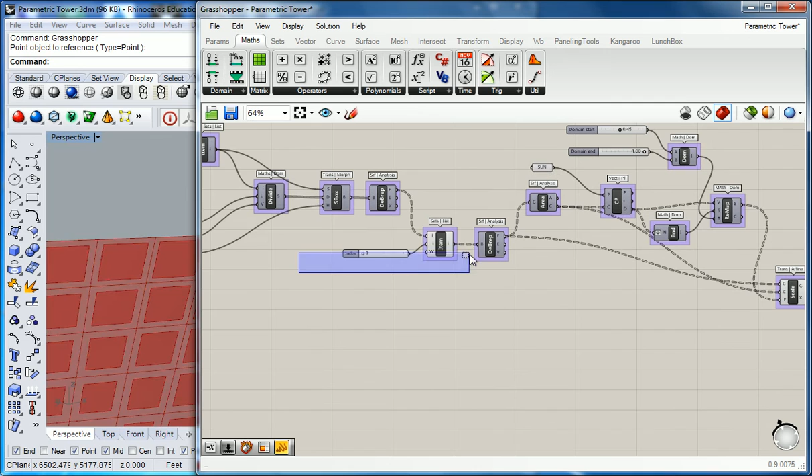So what we need to do is grab the four corners of this surface, and then we need to take list item and get the front surface and grab the centroid and connect those with lines so that we get our pyramid. And that's going to be the beginning of the way we're going to construct this. So to get the centroid, that part's really simple.

So just do a copy and paste on the list item, slide it down a little bit, and change your index to 5. Or if you're already on 5, then change it to 0. And that'll give you your front and back surface like that.

Should we increase the space between them? If you want to, yeah, I would. I would give it some good depth. Like proportionally, I'd say if your panel is, yay wide, you should probably have at least half the width or height of your panel in between them. Something like that, just for visibility's sake. Okay.

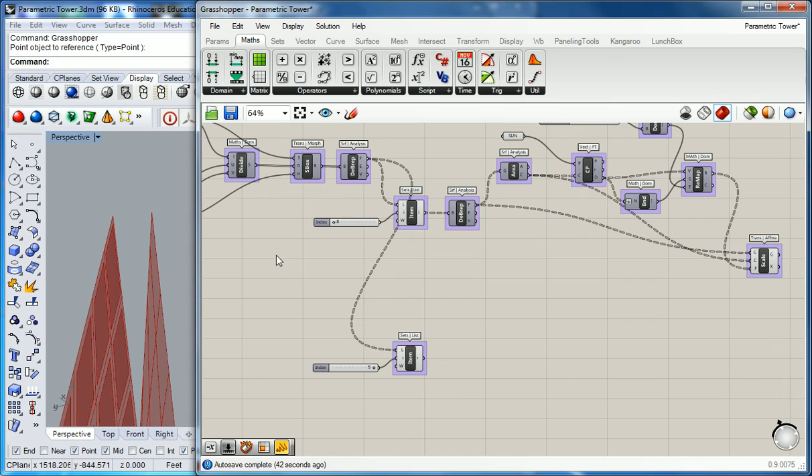Now, the centroid is really simple for us. Now that we have our list item, we just need to do an area and plug that into the list item, and that gives us our centroid. And then you can move it kind of all the way over here closer to scale, because we're going to do some things to scale and then use the area very shortly after that.

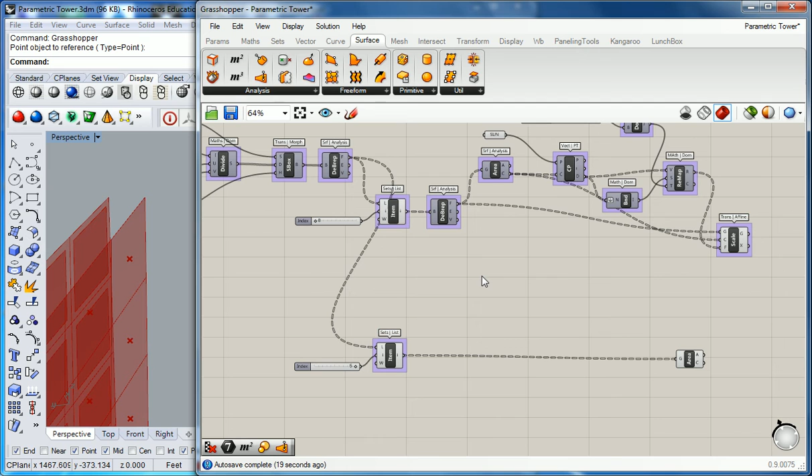So for simplicity's sake and for visibility's sake, take your two list items and turn them off. You don't need the original surfaces anymore. Sorry, that's up there. These. Turn these off. All right. So now we're going to go back up to where our scale was, and we're going to work on the scaled geometry.

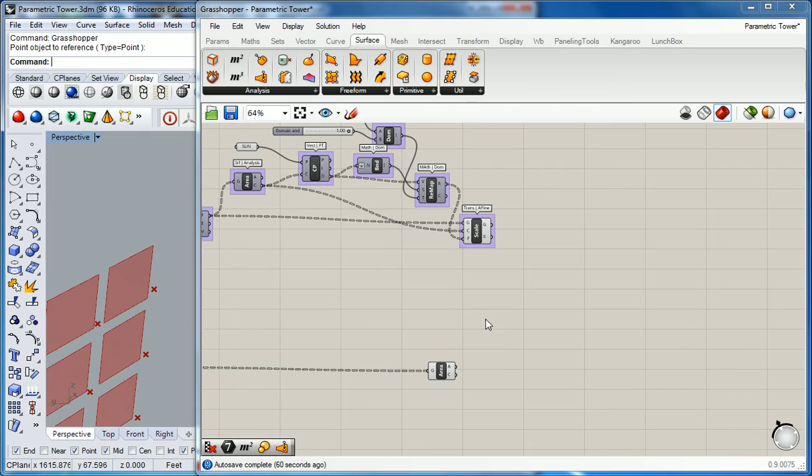By deconstructing it into component parts, but in a very different way than you're used to so far. So in order to get my four corners, that part is really simple. Obviously, it's just another deconstruct BREP. So deconstruct BREP on the modified geometry, and now you have all of the vertices. You can turn the original geometry off.

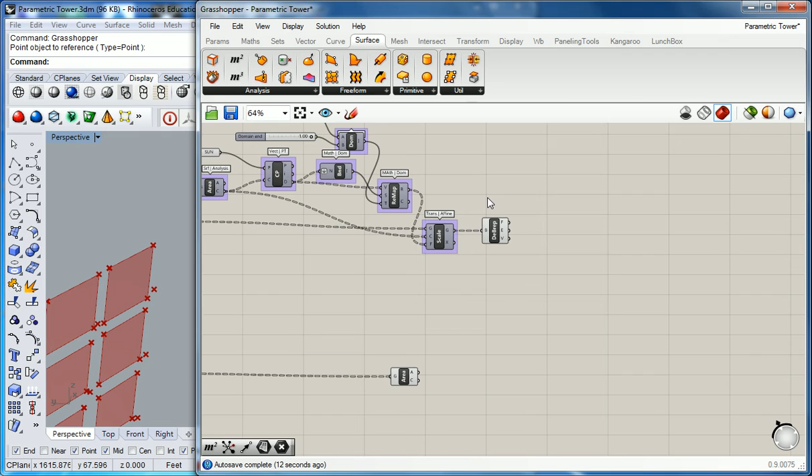We can, at this point, create a line, or we can create our quad lines, our quad legs like we did with the space frame exercise by dropping in a line under curve primitive line. And you can imagine all you have to do is connect the vertices from your deconstructed BREP to the centroid of your offset surface, or the alternate surface, I should say.

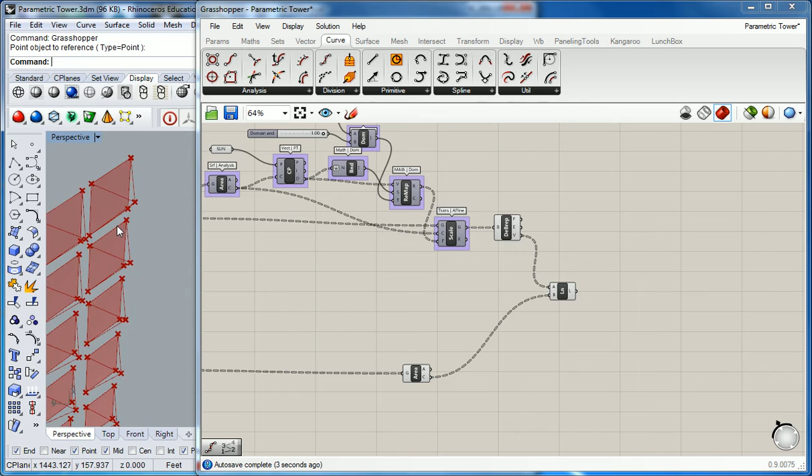All right, and it should look something like this. Every single one of these should begin to be constructed into a pyramid.

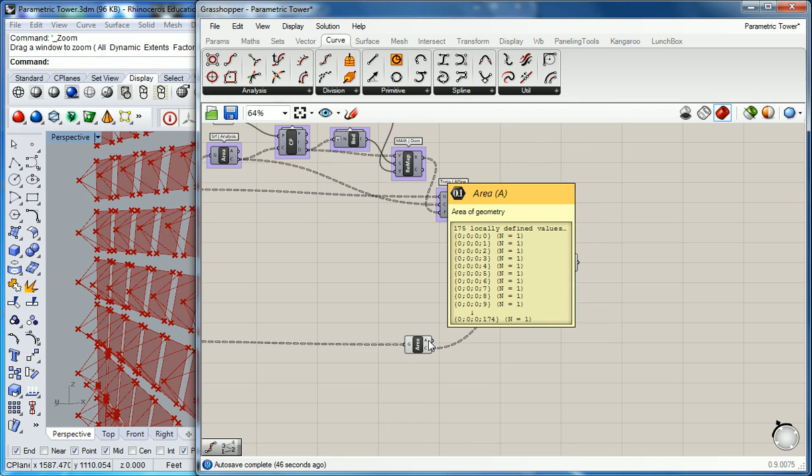What's the area node connected to? Nothing. Yeah, I don't have area connected to anything. You don't need area. Area is a numerical value. You want the centroid. Oh, okay. So the centroid is plugged into the line.

But what is that geometry for? Within that one. This? What is that plugged into? This is the geometry input, and it's plugged into your original list item, front face surface, yeah. Oh, you just repeated that, okay.

Okay. So, guys, the next thing we need to do here is do a couple of steps where we're constructing a line and finding the midpoint of that line. So, we're going to use the edges off of this deconstruct BREP and the faces. So this is kind of an all-encompassing, very important deconstruct BREP.

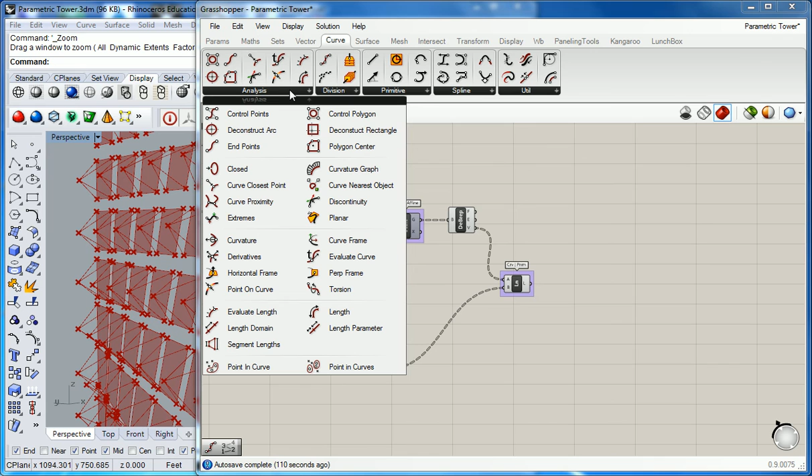It looks like this. Let me find where it is here. It's under Analysis, Evaluate Curve is what I'm looking for. There it is. So under Curve, Analysis, Evaluate Curve, drop that in, and let's take a look at it. It's going to ask you for a curve, obviously, and then it will ask you for a parameter on that curve. And the important thing to understand about that is

when you reparametrize something, remember when we did our domain construction of a surface, you're setting a percentage of that surface via a numerical value, right? So 0.5 would mean that your domain for either the left or right side or the top or bottom side would be halfway across the surface.

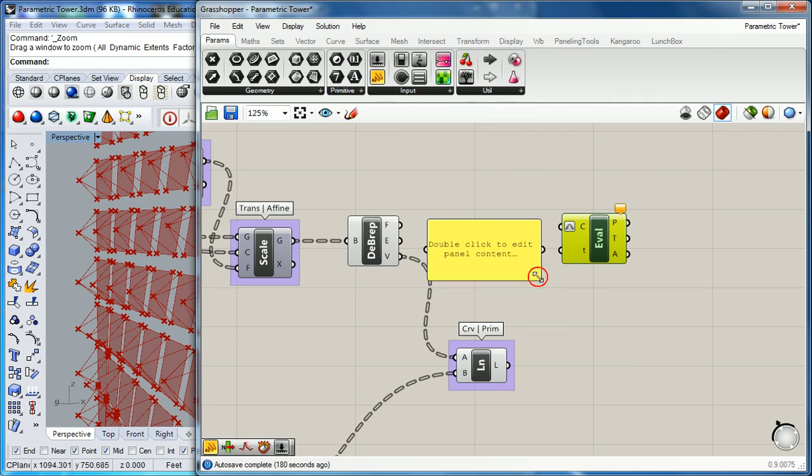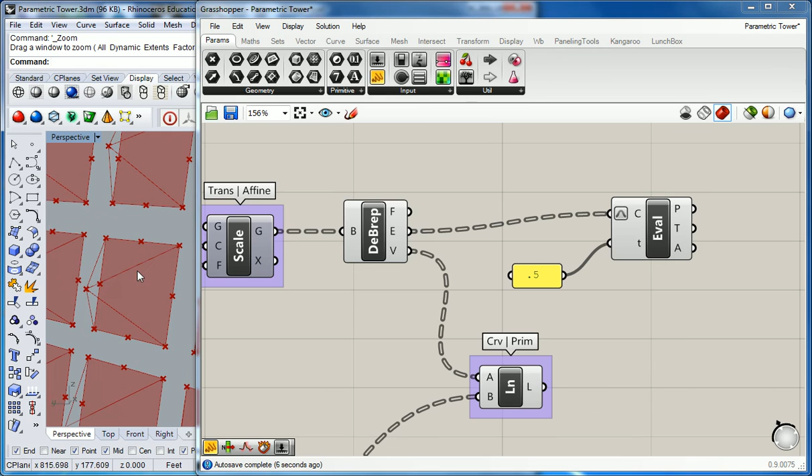So we can reparametrize the evaluate curve, right, the curve input, and then we can tell it using params and input, and then a panel, just give it a 0.5. And then when I plug my edges in, you'll see that it actually finds all of the midpoints of those edges.

And just a heads up, this panel is something that when I was doing some research on this one, I actually found a nifty little workaround. Rather than using the param input for integer and having to modify all the values for it, you can just do a panel and it'll just show you the number because the number is the number and it displays it. So that works too. It's better than my method. Evaluate curve is under curve analysis.

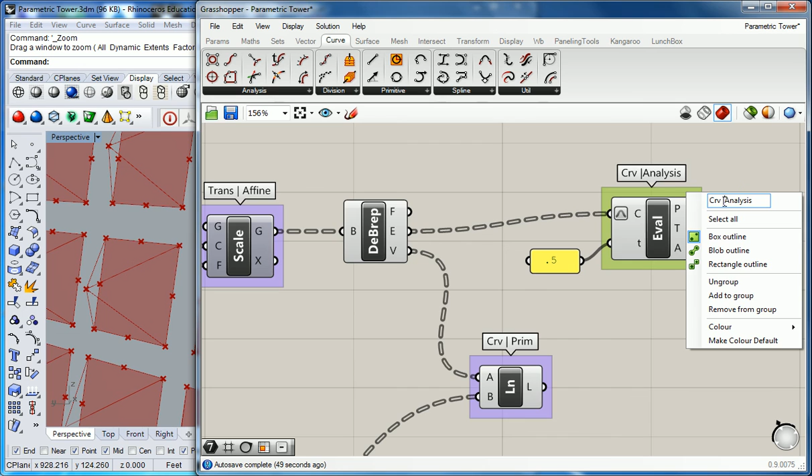Okay, we're getting there, guys. This one isn't too much longer. So then after you have that curve, what we need to do is create a line from the centroid of these panels to the points that we just created using evaluate curve. Because look at the output. We have the points, we have the tangent vector, and we have the angle.

So the points can actually just be connected via a line all the way back to the centroid of the surface itself. So not this centroid, it's actually all the way back here, this original surface analysis one. So I'll pull that down kind of like this. Looks a little funky, but you get the idea.

And we're going to drop in another line, and we're going to draw a line from the points of evaluate curve to the original centroid, and it looks like that. So you should have a cross through the center, and you should have your pyramid construction on top of it. So what I'm going to do is stop here and make sure that you guys are caught up to that point before I move on.